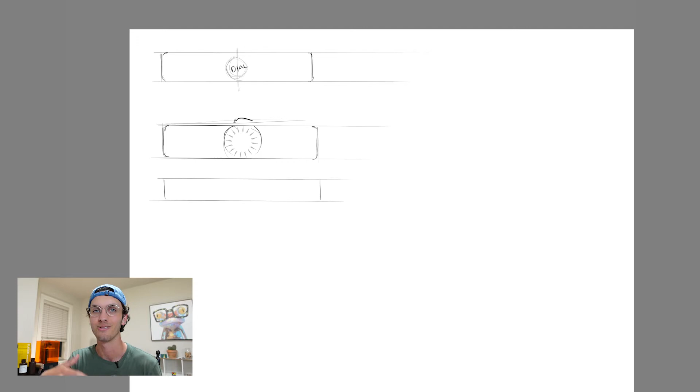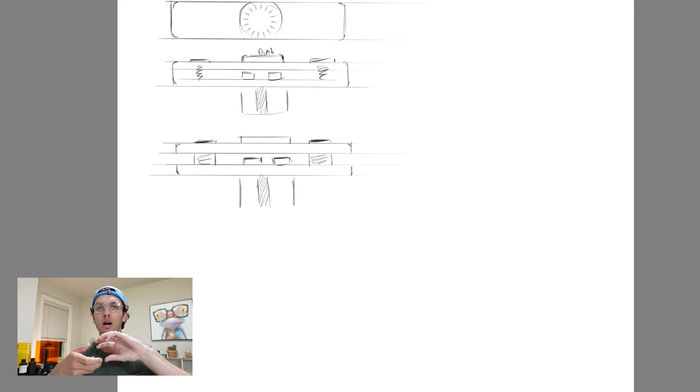If you didn't see the first episode, I had a circular shape with a kind of groove in the middle. And when you turn the circles, there were 2 circular parts. So when you turn those in opposite directions, the groove would turn, and then the cord inside the groove would turn and wrap up the cord. So that's kind of what the mechanism is.

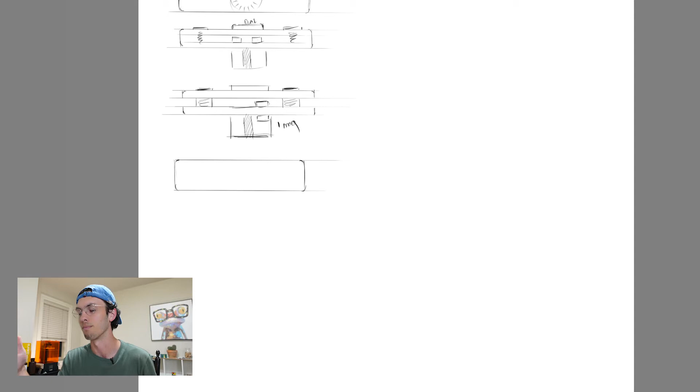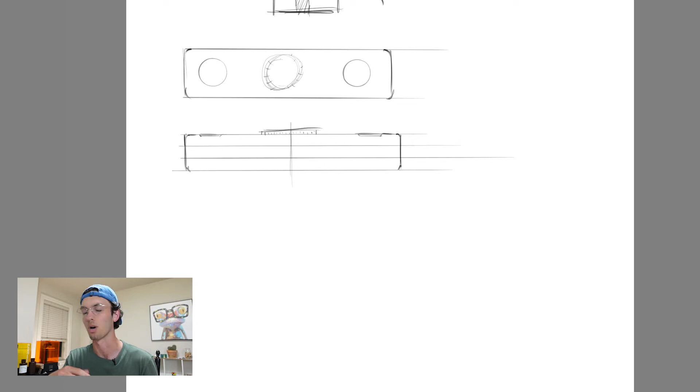I want to make it more of a rectangular shape to fit the form of a cord better. And I thought of turning the rectangles like I did the circles in the cardboard model that I showed last episode, but I'm thinking of instead having a dial at the top. I think that would be more ergonomic, it would be faster to turn, and it would be easier to turn.

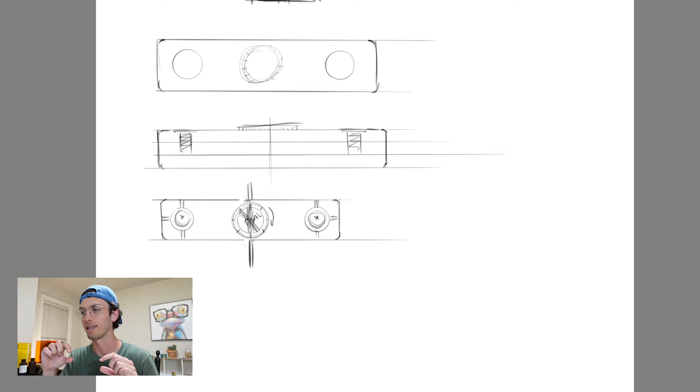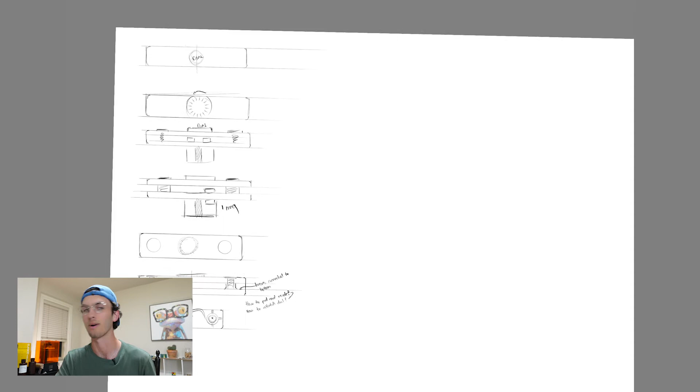Right now I'm just drawing different versions of that dial, maybe adding 2 screws on either side of the organizer so that I can connect those 2 rectangular parts together, and then being able to have the dial loose so that you can turn it. Right now I was actually explaining the mechanism behind these screws and how it helps to keep the cord more secure, and it keeps it from unraveling.

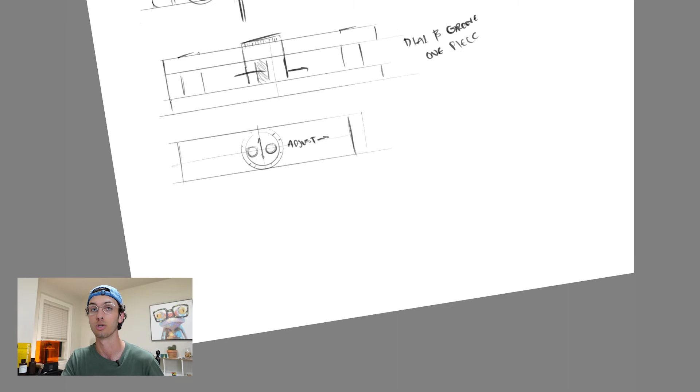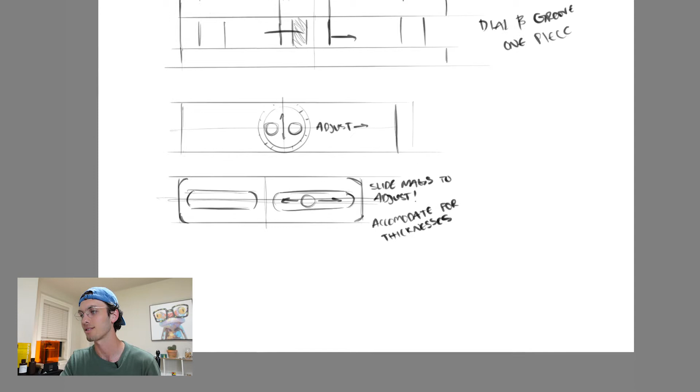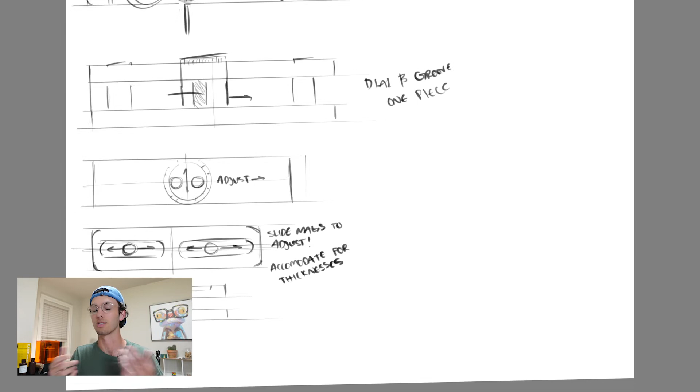I tried to figure out a way to design the two rectangular parts so that you could easily take them apart and put a new cord in, because I don't want to have to unscrew the product every time. I don't think I'm actually going to want to put a new cord in, but from a design perspective it's probably a better idea. I was also trying to figure out how to make the size of the groove adjustable so you could fit multiple types of cords, since cords aren't all the same size. That would be a cool feature, but I decided it was way too complicated for what I wanted to make.

Let's see what happens next.

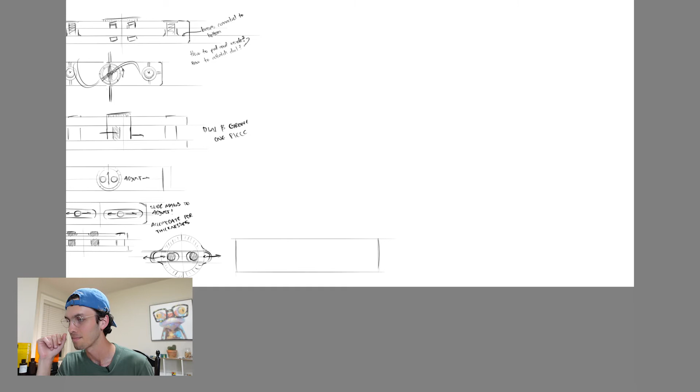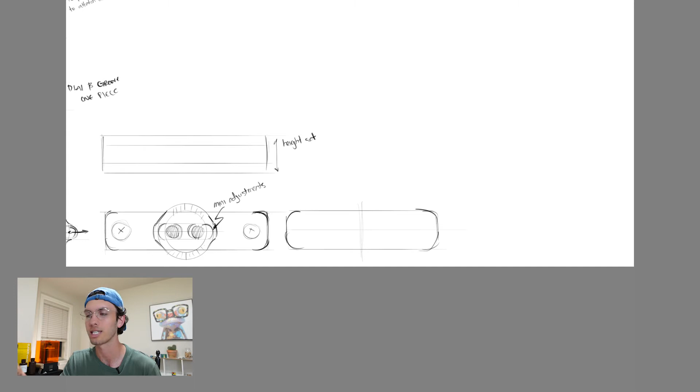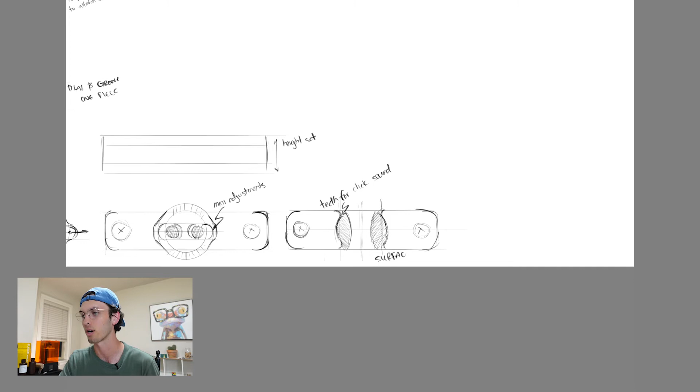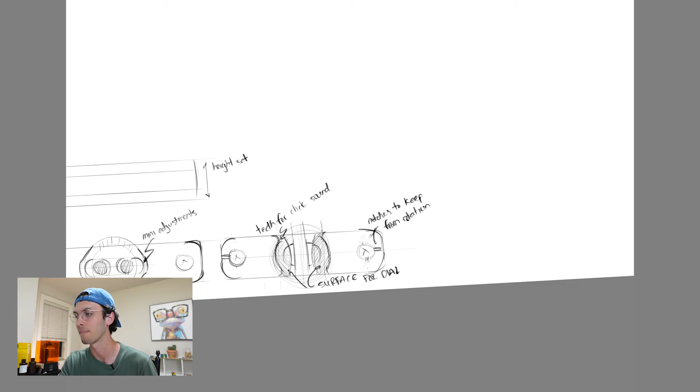With the dial on top, I tried to have a circular pattern groove, kind of like what you see on the digital crown of the Apple Watch, with those little divots on the edge that give a bit more grip. It's also a design feature I really like, I think grips make products look very high end. It's just something I thought would look nice, especially since the dial will be so small, so it'd be nice to have a little grip on it.

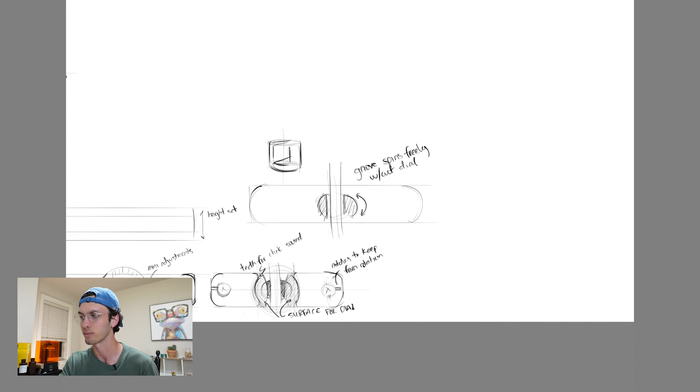I'm still trying to figure out how to have a removable cord with magnets. I don't have the magnets yet, so it's quite difficult to think about the size and placement. I thought of maybe doing a snap fit mechanism instead of press fit magnets, since I don't know the magnet dimensions right now.

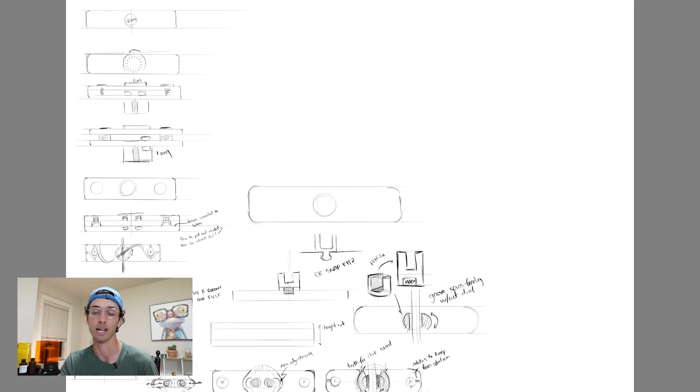Then I thought to have two very thin plates that go on top of each other for the bottom rectangular part, so that I could slide the groove in and then screw those parts together.

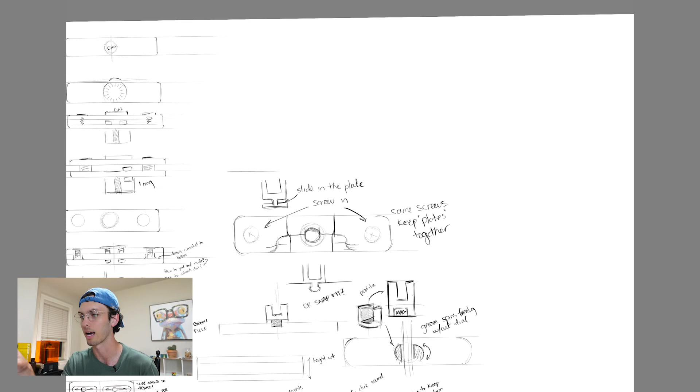Okay, so the initial sketches are done. I don't have the magnets yet still, but I'm going to go to CAD anyways just to see what I can come up with as far as 3D shapes go from the 2D shapes I've drawn. I think I know the general mechanism I want, but I'm just going to go to CAD to see what I can come up with. Once I get the magnets I know I'll have to do a lot of revisions, but I just want to go to the next step to see what happens. Let's head into Fusion 360.

Okay, so I finished the CAD model. I really don't like it. I don't know where I'm going with the design, I don't like how the parts are going to fit together. It's bulky, it looks like a transformer. I want it to be as low profile as possible, and this just isn't that.

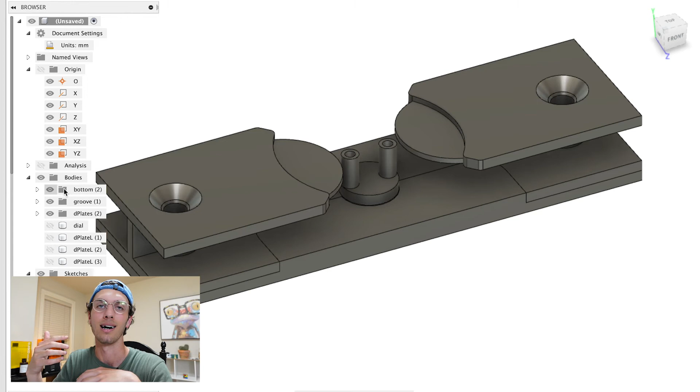So I think I'm going to wait for the magnets to come, and think a lot more about what parts could work. I might make some changes to the mechanism. I'm gonna wait for the magnets and see what I can come up with, because hopefully this will not be anywhere close to the final product. So let's just go back to some sketching.

The magnets came, which is really good, because that means I don't have to think about changing the design and wasting material on my printer. So I can go back to sketching and do some redesigns, and make sure I have a really solid CAD model, send it to my printer, and hopefully I'll have a design pretty close to what I'm looking for.

So let's just head back to the iPad, do some more sketches, and we'll see what we can come up with. Maybe I'll have a printed prototype in this episode, maybe it'll be next episode. I'm not trying to rush this, I'm trying to make it a good product. That's just what the design process is - sometimes it takes a really long time. So let's just go back to the iPad and do some sketches.

Okay, so second round of sketches, feeling pretty good because I have the magnets now. I have a little bit of a better idea of the sizing and where I can put them. I got a sense of how strong they are as well, which is a pretty good thing to know, especially when you're dealing with magnets in a very small product. So right now I'm just going through some sketches.

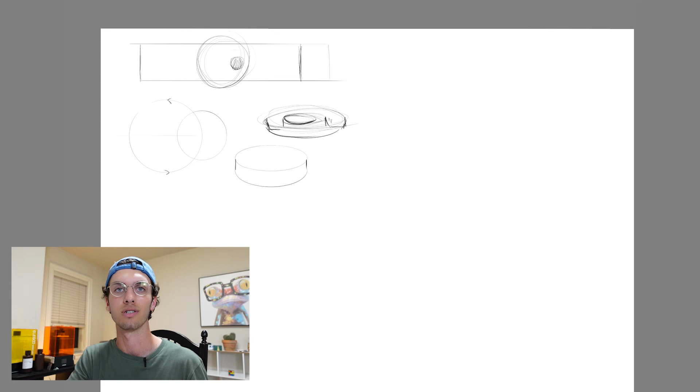I remember seeing this watch on Instagram, by I think Wacom Design or something like that - I can't remember his name, and I'm sorry about that. But his watch design was so cool because it was like a little dial with a little ball that moved in a circular pattern throughout the day. And I was inspired by that in these first few sketches.

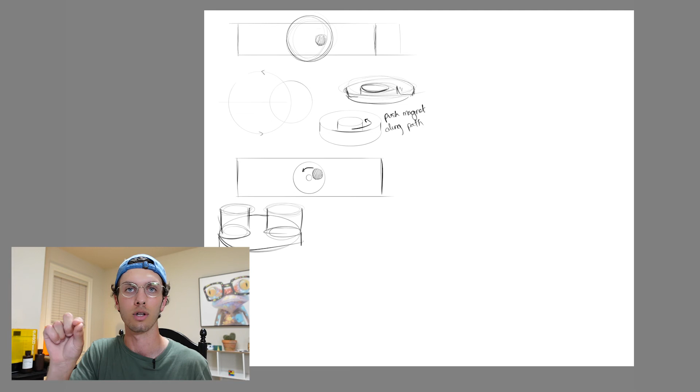So maybe I thought that you could turn the magnet on the top rectangular part to wrap up the cord. That ended up not really working so well. I found another idea that I'll see later on.

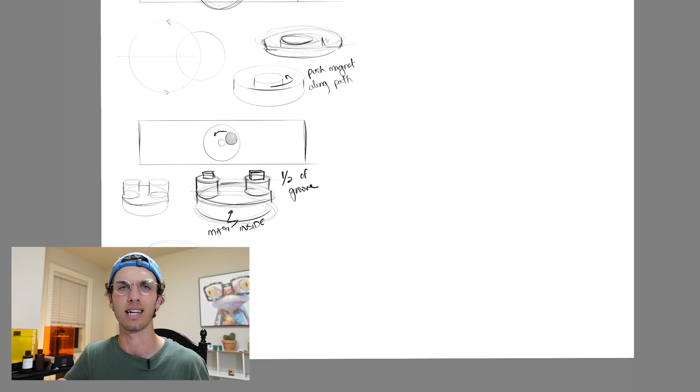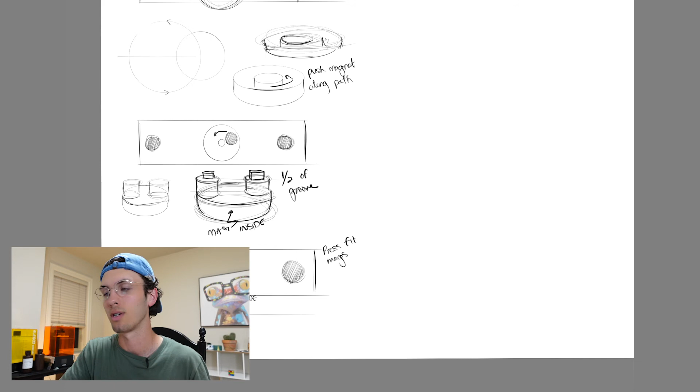And right now I'm just making notches on the groove so that you can have two halves of the groove connect via a magnet - or not a magnet, via a notch. I'm just trying to figure out a way to have the notch open so that you can put any cord in there really, really quickly.

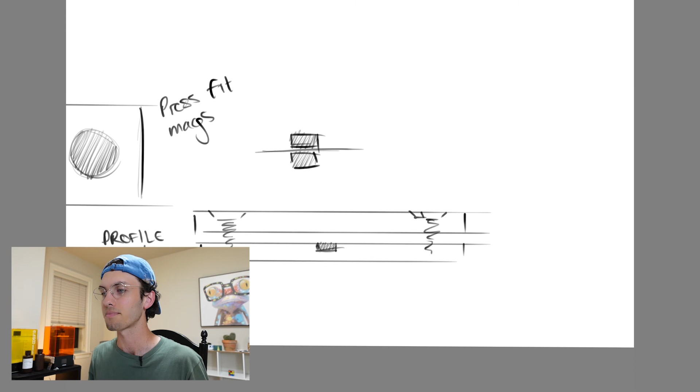And then I did go back to the screws because I do kind of like the look of screws - they're very industrial. So I'm just trying to figure out how to fit those two rectangular parts together.

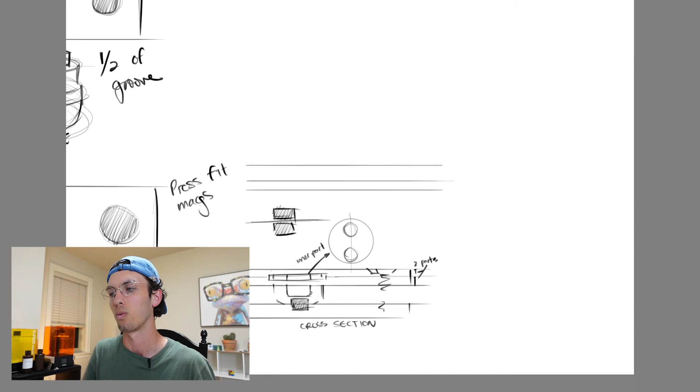And then I came up with this idea: if you have a hole in the top part of the rectangle, to put a kind of hook shape inside that hole with a magnet in the center axis of that rotating groove. Those two magnets would hold that groove in place, and then a switch at the top of the rectangular part to lock the groove in place, and then to turn it around. So I think that's what I'm gonna go for. It seems complicated just by me talking about it, but I think it's actually a fairly simple mechanism.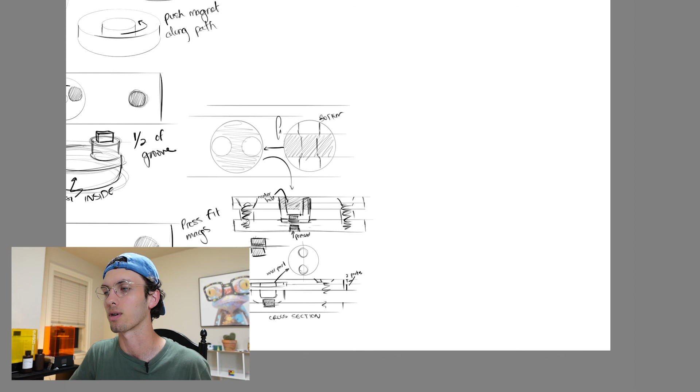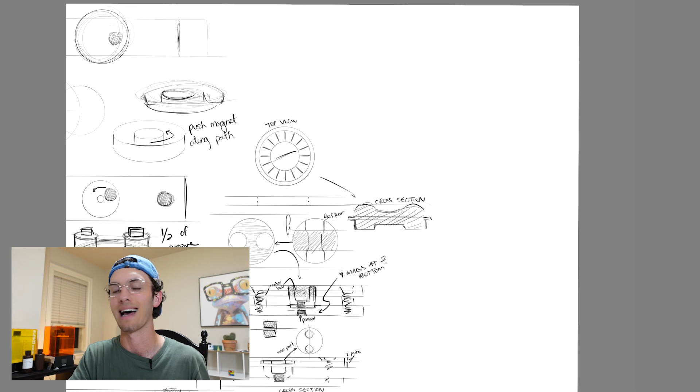I'm almost done with the sketches right here, I think I have like two or so more. But I'm thinking to have a little switch inside the top bit - the top bit's gonna be two parts, and you're just gonna be able to move the switch back and forth to lock that groove in place. And then again, with that Apple Watch digital crown look, I really liked that, especially if you can have some grip on that dial to turn it. So I think this might actually work.

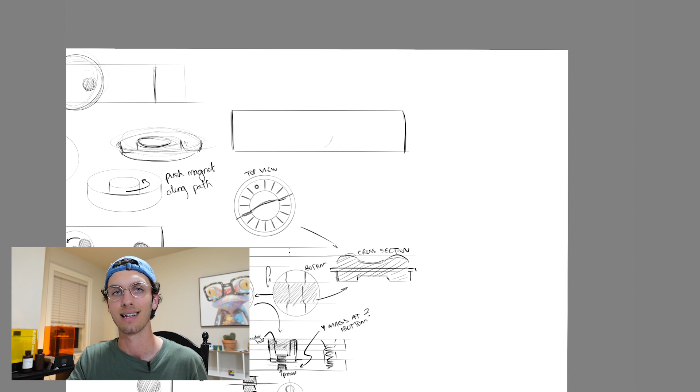So I'm not actually gonna print in this episode, I'll print tomorrow - it's getting really late and I'm tired. So I'm happy though, because I'm really into this design that I've come up with.

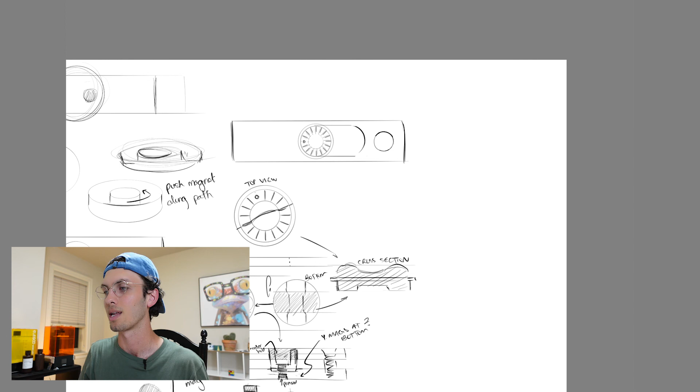Especially right now, you can see that I'm drawing this final shape, kind of asymmetrical looking. And I thought to round the top part - I think that would look really cool.

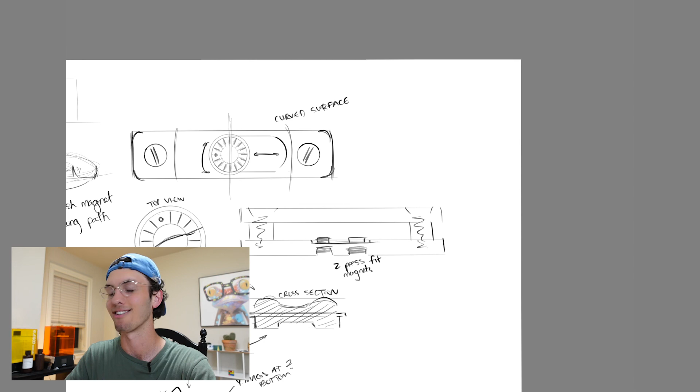So that's it for this episode. Next step is to do some 3D printing prototypes. So I have the magnets, I have my drawing concept, and sketches are done. And I'll see you in the next episode with some 3D printing, prototyping. It's gonna be fun. So I'll see you in episode 3.